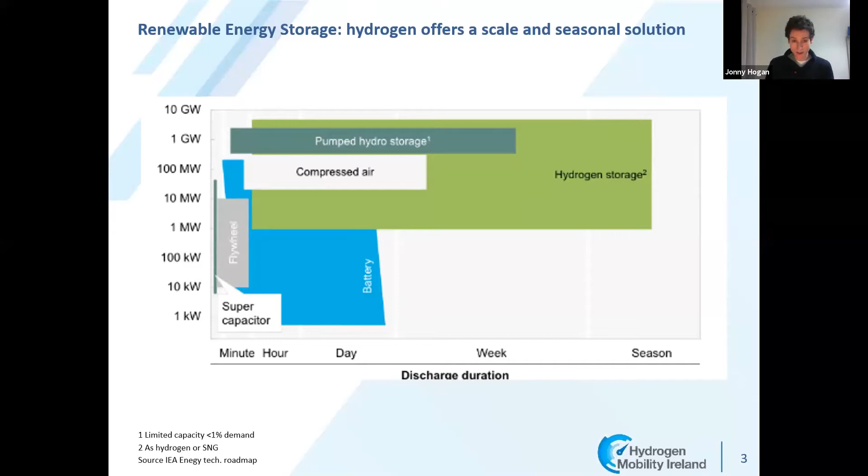So if we go out to 2050, hydrogen is almost a near certainty, it feels to me at the moment. And I think that's particularly the view coming from the EU. So 2020 was, I think for the world of hydrogen, a very positive year. The EU announced a hydrogen strategy, and in that it set out a roadmap for renewable hydrogen. I think that's the key point to reiterate here.

It's renewable, so it's generated using electrolysis - electricity splitting water into hydrogen and oxygen. We can get hydrogen from steam methane reforming, where essentially we're stripping it from a methane atom, but that has carbon dioxide emissions attached to it, so that therefore is a problem. Now it could be that carbon capture and storage can help us in that regard, and that's certainly something that hasn't been ruled out. But I think as a technological solution, electrolysis is more viable for me than carbon capture and storage, and it's certainly much more scalable, can be used around the world much more easily.

So big ambitions announced by the EU - over the next 4 years to install around 6 gigawatts of electrolysis, and that then increases to 40 gigawatts of electrolysis by 2030. I mean, to put that in scale, the 6 gigawatts of electrolysis is close to the amount of electricity generation we have in the Republic of Ireland.

So there's significant numbers. Hydrogen is a new energy vector. I mean, in some ways you could argue it's the first new energy vector we've had for pushing something like 100 years. So it represents a massive challenge. You're essentially competing against incumbent supply chains that have existed for many years. You're competing against fossil fuels, which are very energy dense and mined and sourced around the world. So it's a tough ask for the sector.

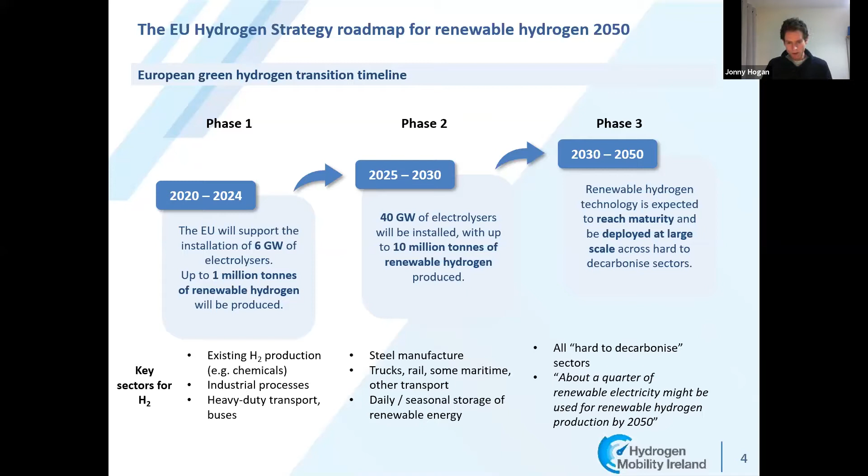But hydrogen, what's fantastic about it is it's very versatile. It's anticipated it will have uses in industry, in transport, and in electricity generation and in the heating space. But where we see hydrogen first getting used is, certainly in Europe, on the industrial side, to replace its use currently in chemical processes, because that sector already exists, so there's a natural replacement there. Where we next see it really taking off is in heavy duty transport and the likes of buses. And then as we move through the second half of this decade, we anticipate more transport being able to use hydrogen, and then the rest of the uses.

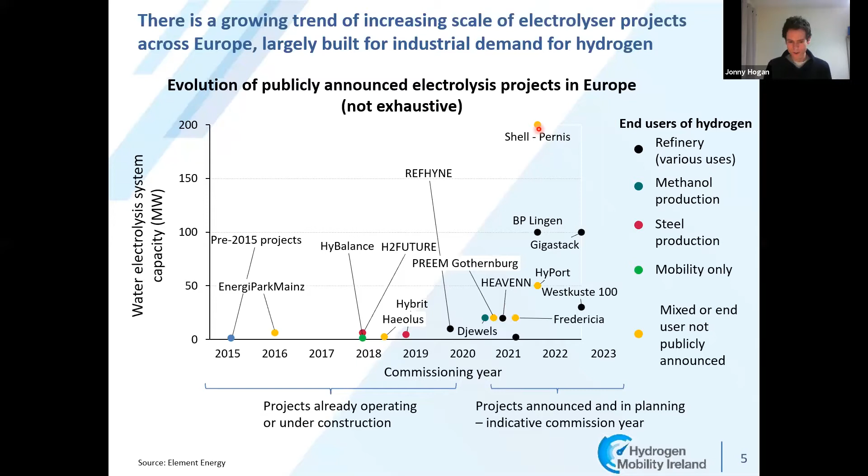So I mentioned that transport will be one of the early movers. And so the question is, well, why transport and not the other sectors? Without delving deep into the economics, one of the ways we can look at that is to say, well, okay, in the heating space, how will hydrogen get used?

The incumbent technology it may have to compete against is, let's say, a gas boiler. It's an efficient piece of technology, with efficiency of close to 90%. If hydrogen is used in the same context there, it's going to have a similar efficiency. If we look at electricity, a combined cycle gas turbine has an efficiency of around 64%. If hydrogen gas is used in the same way in a gas turbine, it's going to have a similar efficiency.

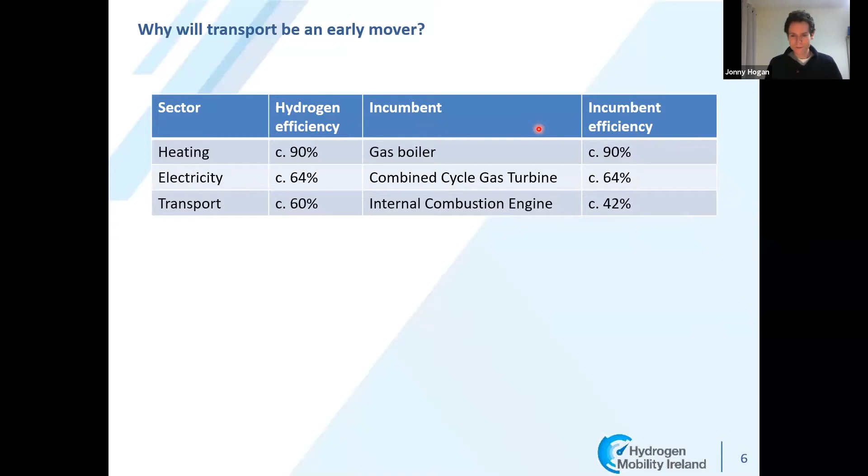But when we look at the transport side, the internal combustion engine has, certainly for trucks, an efficiency of around 42%, although if that number's wrong, I think members in the audience will probably know. But how will hydrogen be used in, let's say, a truck? It's going to be used in a fuel cell, where we see an efficiency of around 60%. So we've got an intrinsic advantage there over the internal combustion engine.

And then another major factor from a business perspective is that taxes are a major component of the end fuel price. So governments have levers to promote the use of hydrogen, whereas in the heating and electricity space, the taxes are much lower for the relative fuels.

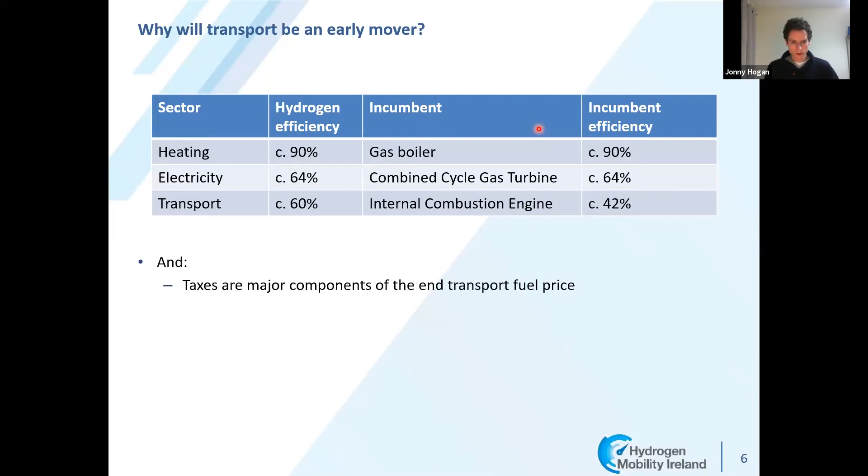The way you use your vehicle today can be pretty much the same when it comes to fuel cell vehicles.

So who do we see the earliest applications being for? It's long range rapid refueling customers, e.g. taxi fleets. We're seeing projects across Europe where taxi fleets are deploying hydrogen vehicles for that reason. If there's cars operating close to 24 hours a day, if it's a zero emission vehicle, at the moment the fuel cell is the number one solution for that.

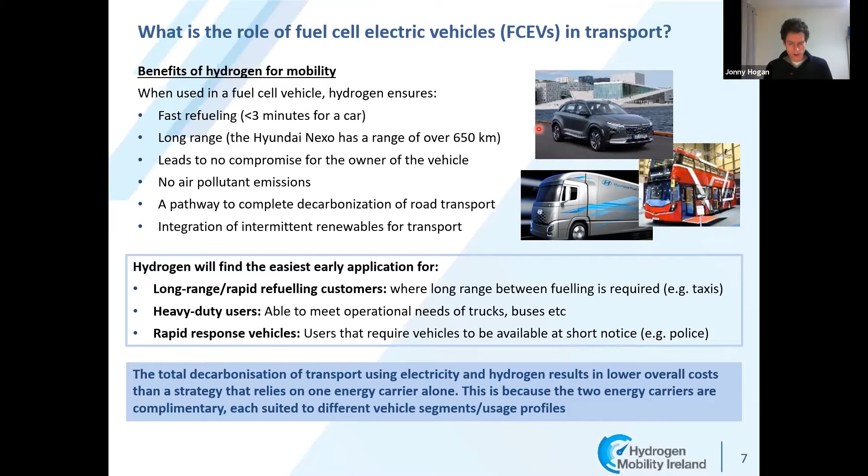Heavy duty users are another key area as well. If we look at the evolution of the market and where vehicles are, fuel cell vehicles being used in transport is one of the earliest movers. One slight downside, though there are positives here, is that the rollout of vehicles by OEMs is lagging a bit where ideally we'd like to be. But we've got that chicken and egg problem in that OEMs wouldn't commit to mass production until infrastructure's there, and that's something I'll touch upon a little bit later.

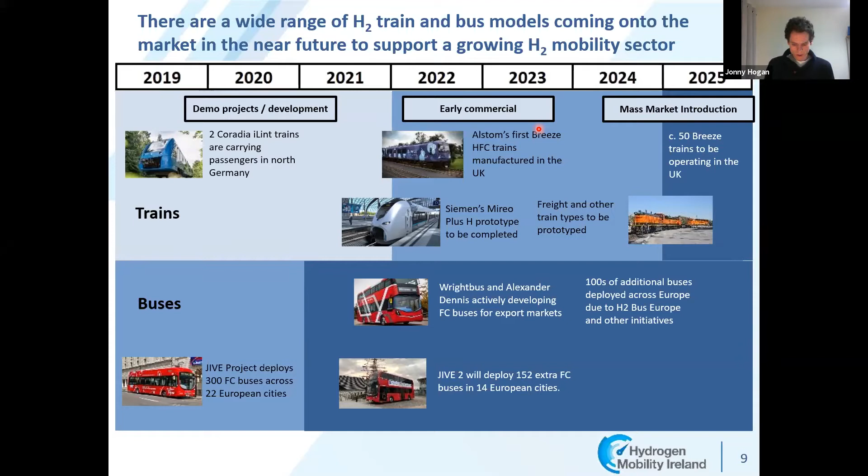Trucks are a very important area. If you look at any of the literature around fuel cell vehicles, trucks are often perceived as going to be the key movers, and that's where the big economic advantage for fuel cells comes in because of the way they scale. Whereas with a battery truck, the battery is such a significant component that the weight increases, and your payload is less. That's certainly an area that we in Hydrogen Mobility Ireland see as being very important.

The slight downside is that we're still away from the true mass market position. Hyundai has a demonstration project underway in Switzerland at the moment, a pretty impressive project. And recently - it's not on this chart - but Daimler announced its hydrogen fuel cell truck, though that's not going to be delivered to customers until 2023, with more mass market deployment from the middle of the decade.

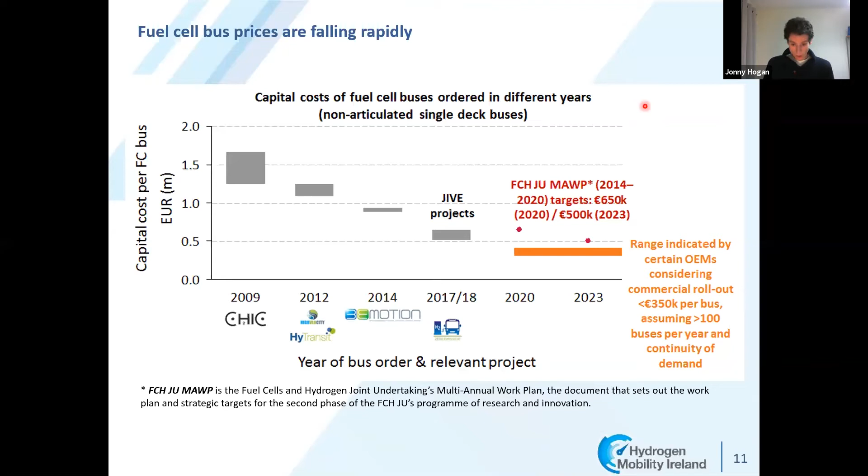This chart briefly shows the reduction in prices of buses, because buses have been the key area where we've actually seen fuel cell vehicles deployed. If you go back just over 10 years ago, you were spending more than €1 million for a single decker bus. That price has come down substantially, and from conversations with OEMs, we'd anticipate in the next couple of years that coming down to €350,000 per bus, which makes it more attractive.

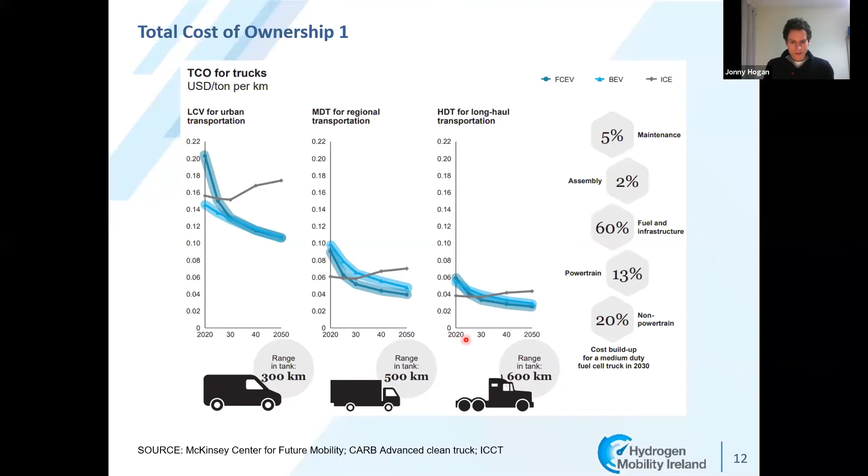The point I want to raise here, though, is that there's no single total cost of ownership calculation. It very much depends upon your fleet and how you as a company may operate. If your battery electric vehicle only affords you, say, 600 kilometers of range, whereas you can get a hydrogen fuel cell truck, which Daimler is anticipating, of 1,000 kilometers, and you're operating a fleet of 100 vehicles, it might be that you have to buy fewer fuel cell vehicles than battery electric vehicles. So that massively sways the argument as well.

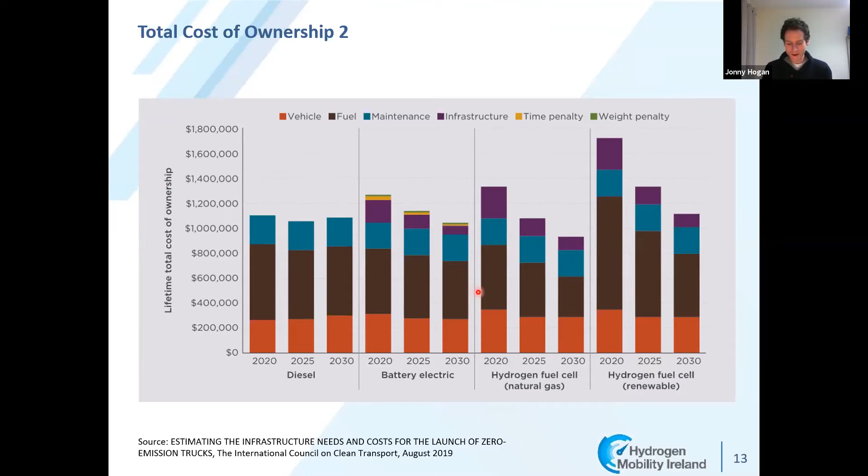I think one thing I would also challenge about this is that they have the cost of electricity falling to 2030. This is a personal view, but I cannot see how the price of electricity can fall over the next decade, given the storage requirements we're going to have to put into the sector, and making the grid stronger to accommodate everything we want to do. So there's no right answer, but really it's something that has to be looked at by individual companies.

To touch upon Hydrogen Mobility Ireland, we're a group of 12 commercial members. We have a range of backgrounds, from wind energy operators, utilities, car companies, and forecourt operators as well. We have representation in the group by government departments, both in the Republic of Ireland and Northern Ireland, who join us on our steering group meetings.

It's very important to have them there, because, for all that I've talked about before, without government policy support and without financial supports, the industry doesn't take off. We're competing against these incumbent industries, and we have to have that support. It's not unreasonable — we're calling for supports that we've seen given to battery vehicles, for instance, and in other parts of the energy sector.

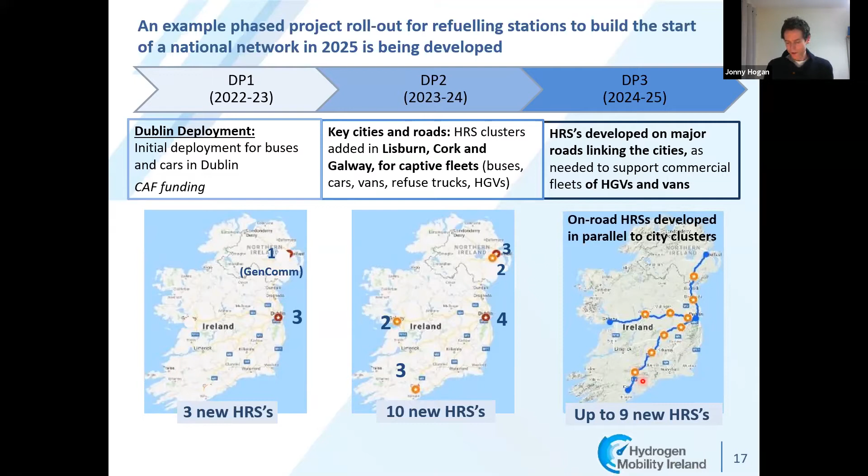As part of the first phase of work we undertook, we did a mapping exercise with some consultants, looking at how we could get a decent level of national coverage up by 2025, and this was the plan we came up with. We're looking at clusters: over the next couple of years, a cluster in Dublin, as we see here. Then as we progress 2023 to 2024, clusters in Galway and Cork. And then in the second half of the decade, as trucks start to come in, we'd be looking to get infrastructure on the trunk roads to enable that national coverage.

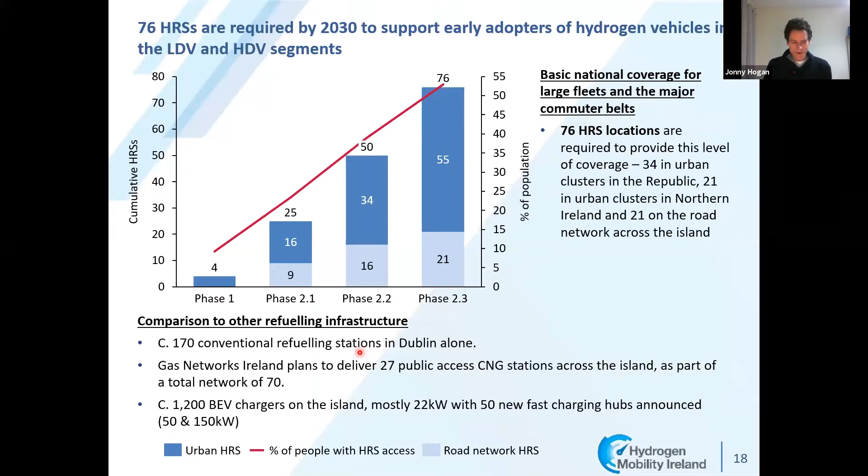So I suppose there's two ways of looking at it. It sounds like a lot of stations, but when you compare it to the number of conventional refueling stations in Dublin alone, 170, that number puts it into relative comparison.

To quickly touch upon the first deployment project we're proposing, it's in Dublin. We're looking at numbers of around 30 buses, 60 cars. This is a plan and a proposal we'd like to see undertaken. It would require investment of around 35 million euros, and we'd hope to have government support to accommodate that. But that would get us 3 hydrogen refueling stations.

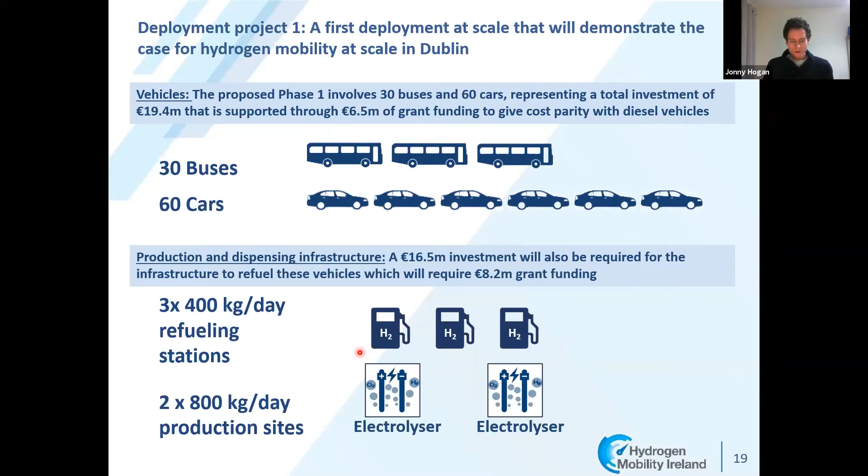The reason to go for 3 hydrogen refueling stations is that we've seen elsewhere across Europe single hydrogen refueling stations, but the problem is it doesn't create a market you can grow off and expand upon. If you get the 3 in, it's a cluster. It gives fleet operators and bus operators confidence that there's going to be that supply there. So rather than going in at demonstration scale, it's trying to go in just a little bit beyond.

Just conscious of time here, so we looked at costing everything out to 2030. Bottom line, we require investment of 350 million to develop what we're looking at, which I think is an achievable figure in our view, and we think the investment can be done. I haven't really touched upon the cost of fuel, but we do think we could be getting our cost of fuel below 10 euros a kilogram, which is a key level.

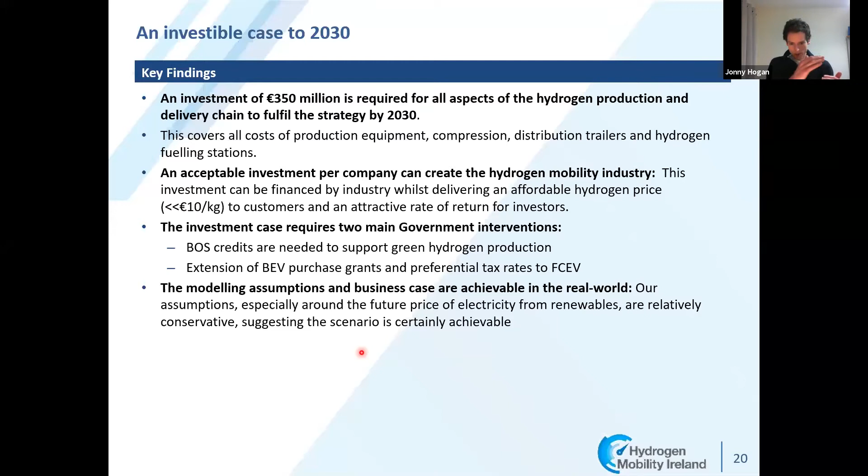But fundamental to it, we would want support for green hydrogen, which effectively would lower that cost of hydrogen, the specific number to be determined, and obviously on a sliding scale as we move out across the decade.

There's a circle here, and at the moment we don't have any certainty at any point in this circle. No one wants to produce because there's no refueling stations, and no one wants to buy vehicles because there's none of the above. So what we really need is an injection of certainty.

Through our conversations with potential producers, vehicle owners and users, the will is there on the production side, and people are absolutely interested in it in terms of operations. But the refueling stations are the hardest piece to get away, because from a cash flow profile perspective, I think they carry more business risk, as you have to overscale those relative to the other components.

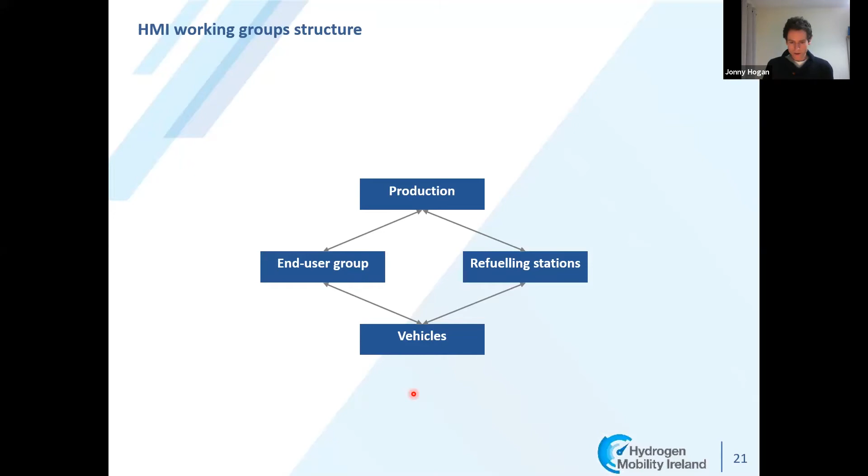The production and vehicles can be constructed so that they very much meet each other, but the refueling station has to be outsized in order to accommodate those. So for Hydrogen Mobility Ireland, the biggest challenge we face, and we're seeing this across Europe, is how we can build this network and get that structure in place to build the refueling stations.

And then lastly, we have got hydrogen vehicles in Ireland at the moment. Thanks to Hydrogen Mobility Ireland, we were able to bring this trial bus in, and that's operated successfully over the last couple of months. We've got 3 more buses being deployed in a trial deployment in Dublin, starting soon, looking to expand that further.

The buses have been with Bus Éireann, which is one of the bus operators here. The engineers are working closely with this, doing great work, and really starting to understand how this could be used in fleets.

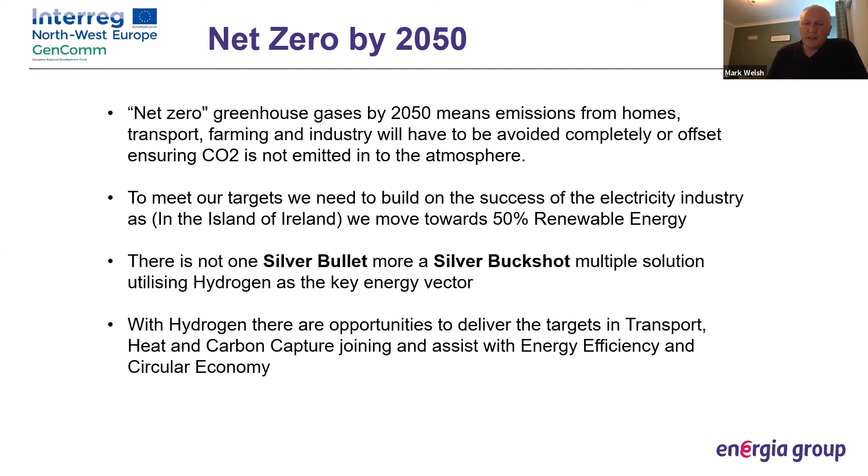So just to show you where we are with renewable assets, I've shown some renewable generation for Northern Ireland, and you can see that we have built up from a low base. In fact, when they started in the year 2000, our target for 2020 was to deliver 12% renewable. We were sitting as an island, and we knew we couldn't have reliability like the whole of GB, a large network that could take additional renewables. So our target given to us was 12% by 2020.

And you can see by 2020, from October 2019 to September 2020, we're sitting now on a rolling average of 47.7% renewable. So it's a real success story that we have been able to build our renewable assets, and something that we should be really proud of.

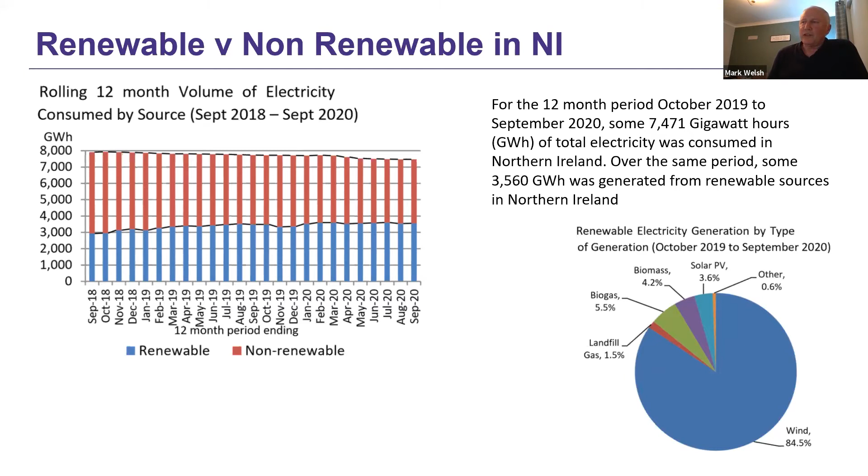You can see here that there is almost a 50-50 split between non-renewable, our gas and oil stations, and our renewable energy. To give you an idea of what that actually looks like in Northern Ireland, the vast majority of the renewables is from wind energy, at almost 85%, followed by some landfill gas, biogas, and solar PV. As a business, we would like to expand in each of those areas.

But that does come with a problem, especially because we've got a lot of wind assets. We all know the wind doesn't blow all the time, and our system cannot cope with renewables only, because we need the big gas or oil plants that carry the inertia. So if there's a major fault, these wind turbines can't ride through the fault the way that a gas turbine can, so we have to be very careful how we operate the system. This means when there's a lot of wind and the load starts to drop, we have to turn our renewable assets off.

It's just the way that we have to operate the system at the moment. That's why you'll hear a lot about batteries and battery storage - that's going to be key to get more renewables on. But at this point in time, all we can do is turn the wind assets off at times of high wind and low demand. This is called curtailment or constraint, and it means we have an asset sitting there that we can't use just because of the nature of the system. So we're losing out on a lot of energy.

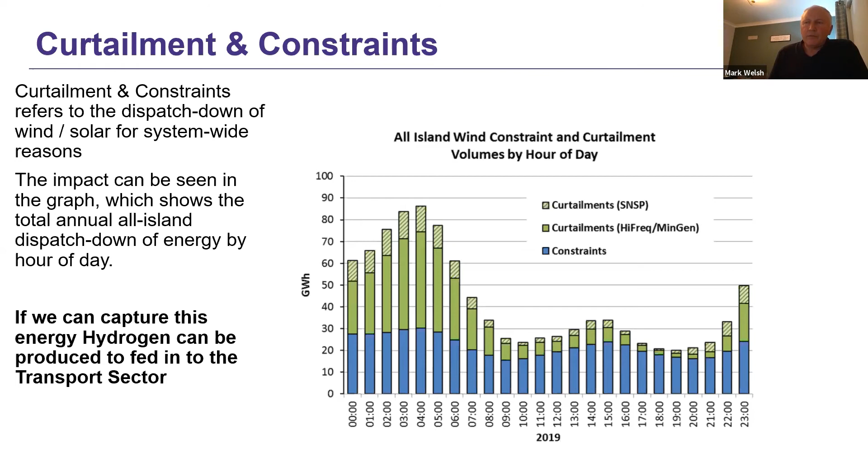That's when we got involved in the GenComm project. I'll give you a brief overview of the area. What we were trying to do was capture these times of curtailment, when the wind assets are being switched off, and then use that energy and put it into another energy vector. That energy vector was hydrogen.

So we would take the electricity that was going to be switched off anyway. We'd use electrolyzers, use that electricity to run them, and the electrolyzers would produce the hydrogen. All you have is your water getting split into hydrogen and oxygen. You store the hydrogen, or put it into pipes in the ground, and then you can use it for various things.

The GenComm project was an Interreg funded project. It was £9.2 million. We had 3 pilots, and being a European project, you obviously have to have partners, and it has to be cross-border - it has to involve other countries. We ended up having 3 pilots.

We had a bioplant in Stornoway in Scotland, and they were using anaerobic digestion to produce hydrogen, using it mainly for heating. They also were using the oxygen from the system, because they were able to feed that into their fish farms, and that would help the growth of the fish.

In Germany, we had solar to hydrogen, and that went into fuel cars, and it's went very well. The plants are delivered, they're installed, and they're working well, giving us a lot of good data and information to show how we can connect them to large scale wind farms.

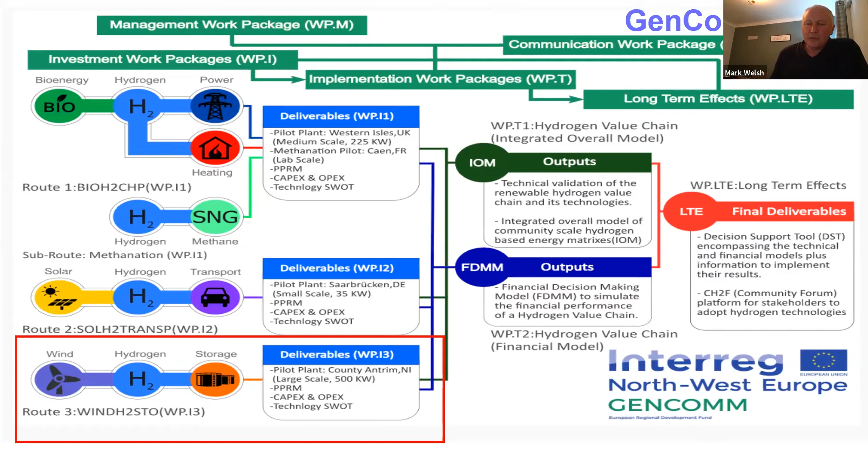So just going on to our particular case study, which I called the Wind to Wheel project - that is to supply hydrogen buses within Belfast. Actually, it's split into two sections. We have the GenComm project, which is our wind farm connecting an electrolyzer to produce hydrogen, which we store in trailers. The second part, funded by what's now the Office for Zero Emission Vehicles, is where we're going to install a fueling station within the TransLink site in Belfast and bring 3 double-deck buses to Belfast.

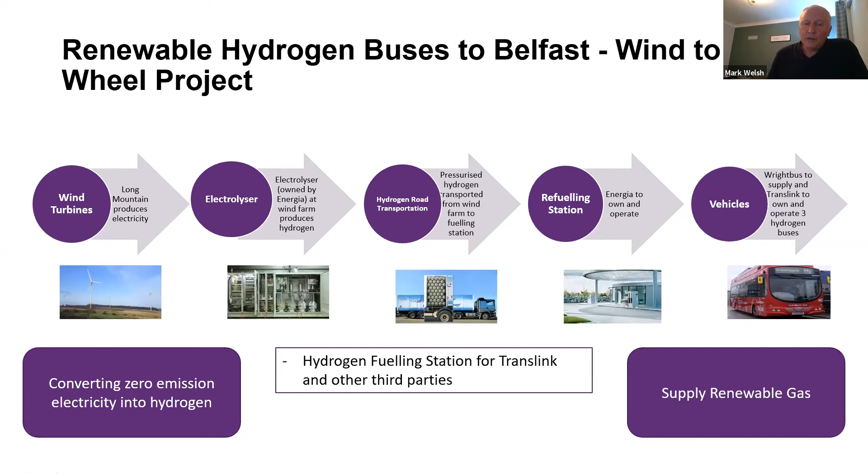I just want to let you know exactly where we are on the project at the moment. So the first part is the electrolyzer. I have to be honest and say that we have been hit by COVID. Everything should have been in and finished this month, but there has been a delay. We are anticipating that the electrolyzer unit will be delivered in late March, and it'll probably take about 2 or 3 weeks to have it installed. So we're hoping that by the end of April we'll be up and operating with the electrolyzer. Things are going well with it.

We are going through all the safety processes at the moment. We're looking at our HAZOP. We've appointed an electrical contractor, and our civils engineers have commenced - they've got the berm in, and they're starting to work through everything else which is required. So it's all hands on deck at the moment to get ready to receive the electrolyzer.

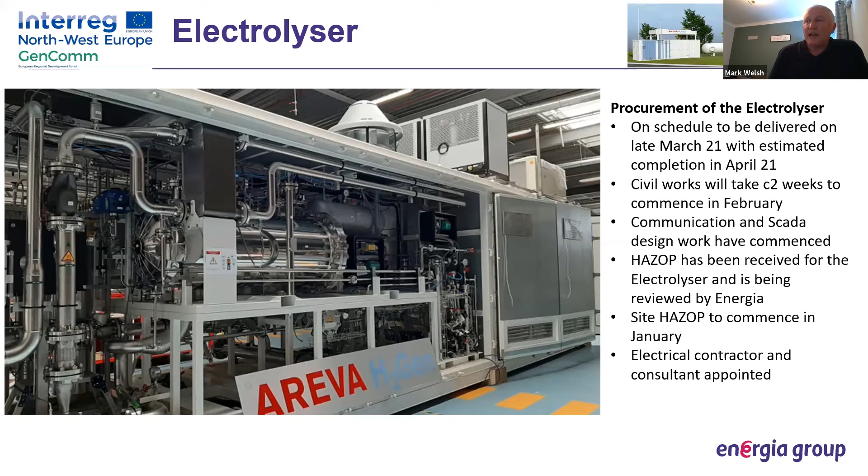As I say, we connect it to the wind farm and we just add water. This unit will split the water, store the hydrogen, and then we can use that, as we'll see in a second. It's a very basic layout - we'll have a high voltage transformer connected through a high voltage switch from our wind farm, and that just supplies the electrolyzer unit.

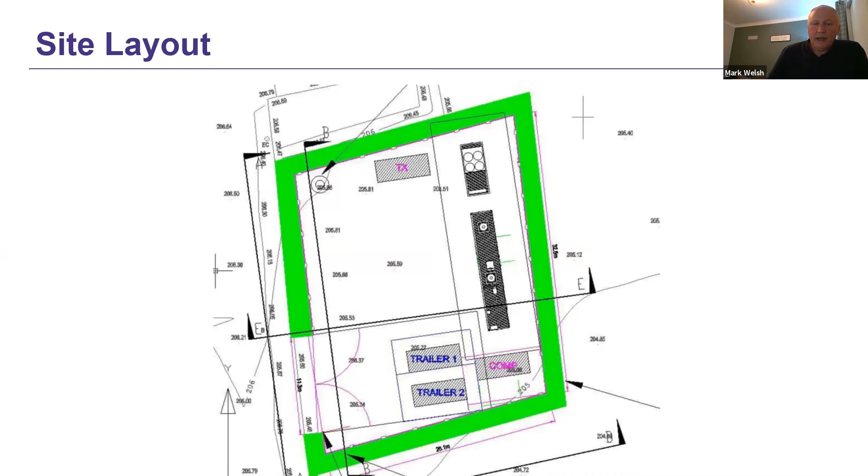That will feed a compressor to take it from 30 bar up to 350 bar, and then our compressor will fill the trailers. And these are our trailers. So our trailers have actually arrived. We are using them, even though we haven't got an electrolyzer to fill them with hydrogen.

So at the moment we're filling them in Aberdeen, and one of us is going to go down to Dublin to get filled.

We are using them to fill the buses that are there at the moment. And I would say that whenever we were looking at developing the project, one of the things we said is, look, rather than putting a new hydrogen pipe in and piping it miles from the electrolyzer from the wind farm down, why not use the infrastructure that's there?

We already have lorries, we've got trucks, we can use the guys that are already driving trucks about, and we can replace a diesel truck with a hydrogen truck. That's what we're doing at the moment with our partners at Petrans, who have been excellent so far in picking our trailer up, bringing it over, and storing the hydrogen for us.

So we're interested in seeing that we can get this business model to work, because so far it has worked really well for us. We've only got 3 trailers, but they have arrived and we are using them.

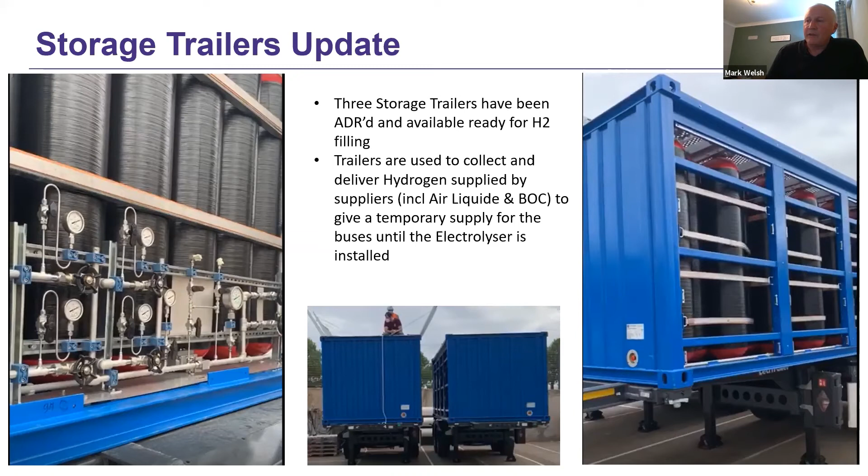Our partners, TransLink, came in partnership with us, and they decided to go initially for 3 buses to trial. The 3 buses have arrived. Again, they were slightly delayed, but did come in December, and they have the buses.

They're now on the road. They're using them just to fill in at the moment, and for driver training. Early indications are that they're working exceptionally well.

They're quiet, they're fast, they're doing everything they're meant to do, everything they say on the tin, and it's a smooth ride. So far there have been no complaints from the drivers, apart from it being very quiet - they can hear everything, so if there's a little buzz or not, they can pick it up, because you just can't hear anything.

Because they were so quiet, they're actually retrofitting and putting in an audio sound system, where they'll be sending out a noise at low speeds until they get up to about 20 miles an hour, when road noise takes over and people can hear the buses coming. But if they're sitting at 10 miles an hour down Royal Avenue, you can't hear anything. So they have this sound being generated as a safety feature within the buses.

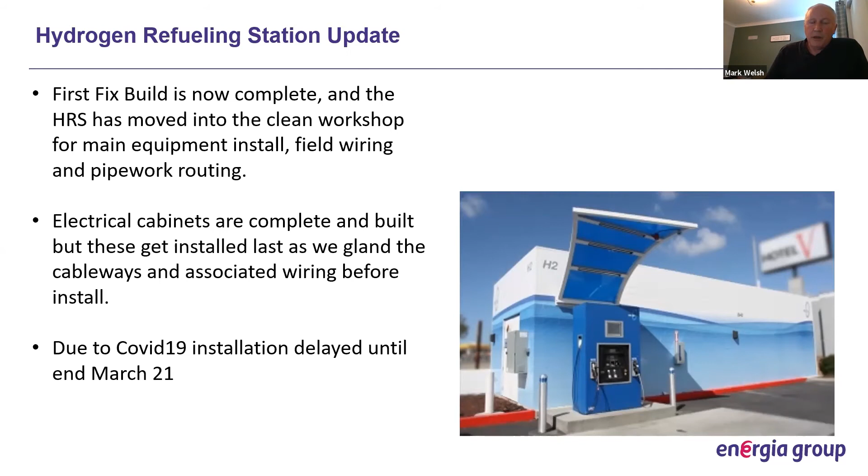Again, it should have been here this week, but it has been delayed. It'll be here in March, but first fix is complete. The problem was that the electrical crew was taken down with coronavirus, so that was a bit of a hold up. But they're going through it, the wiring's completed, and they're going through their testing phase at the moment. So far, everything is looking well on getting the station ready for the buses going into full-time operation, hopefully as soon as our lockdown is over.

There is a transport survey that Dublin City University is doing. It's an opportunity for you to get involved in. They're looking for up to 200 companies to respond to the survey on potential hydrogen transport for the future. I'll not spend too much time on it, but I'm sure we'll send out copies of the presentations, and you'll be able to access that survey. We can send the link out to everybody.

I'll just take a couple of seconds to say that we're not only looking at bus and road transport, but we're also looking at marine as well. There's an exciting project in Belfast led by Artemis Technologies. It's a £60 million project where they're taking the technology from the America's Cup, and what they're able to do is build a ferry on a hydrofoil.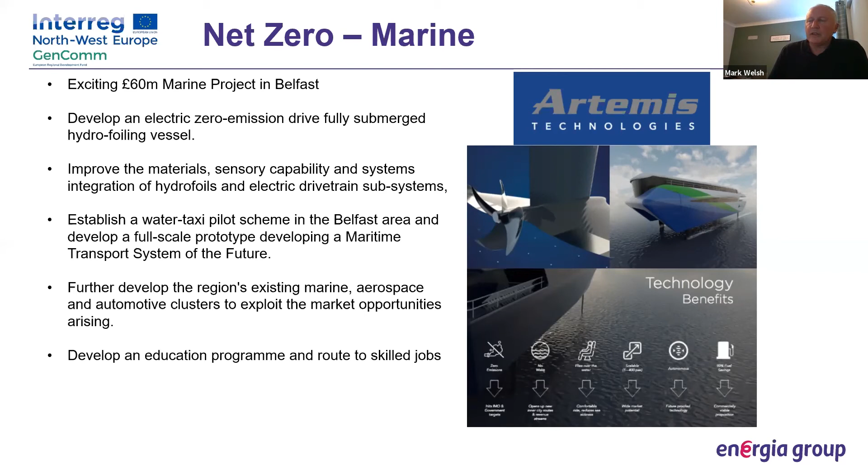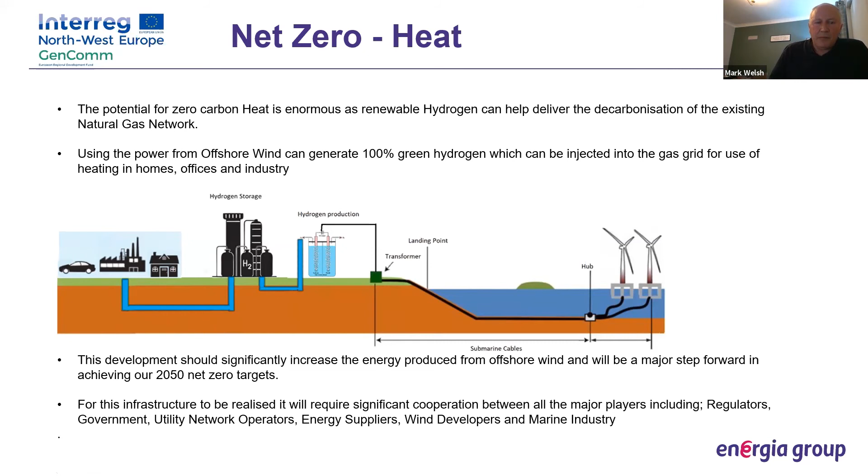The first question is: could hydrogen be a replacement fuel for domestic gas boilers, where there wouldn't need to be much alteration to current storage systems? You may have touched on that there, Mark. That question's from Adam.

Yeah, I did touch on it, seeing that it came in, but I had two meetings today actually. One was with our gas network suppliers, and they are currently looking at projects to see how they can get hydrogen, and how much hydrogen they can get into the gas network. It will include obviously the metering, because you have to meter hydrogen completely differently than natural gas, and we'll also want to look at the appliances and make sure that they operate with hydrogen. There needs to be legislation in place to say that a boiler has to be dual fuel, able to take natural gas and hydrogen. When that legislation comes in, all boilers will be upgraded.